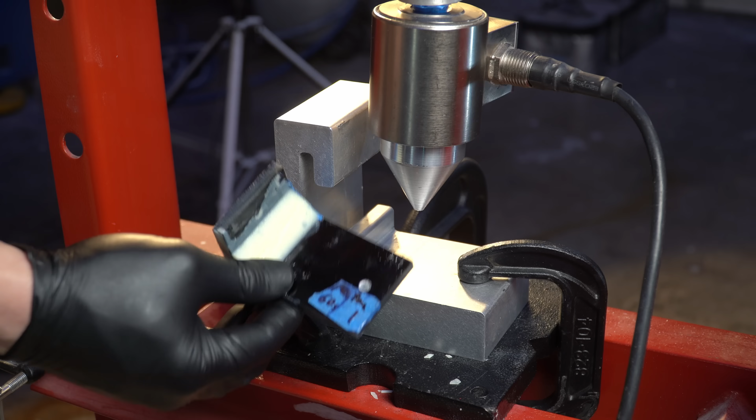I'm about to break these two parts, and they're identical except for one key difference. They're from the same sheet of fiberglass, prepped with the same sandpaper, and bonded with the same epoxy in a mold, so they should break around the same strength.

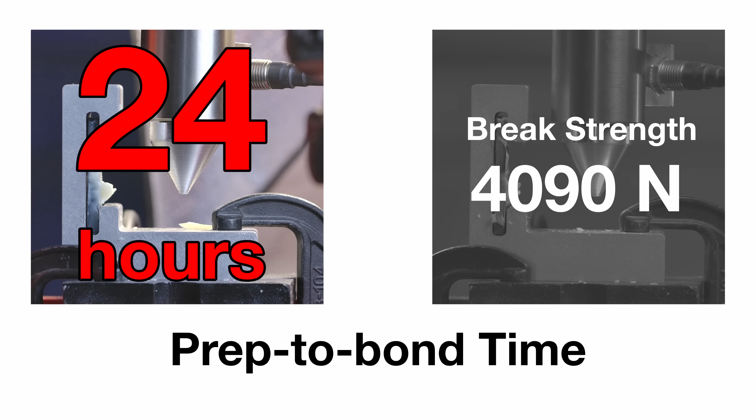What I didn't tell you is this first one was bonded 24 hours after sanding, while the second was bonded right away. If you want strong composite bonds, you have to prepare the surface as well.

So how do you do that? Ask 10 composites technicians and you'll get 10 different answers. Some use high grit sandpaper, some use low, some claim isopropyl alcohol is all you need, and others use atomic oxygen generated by plasma discharge.

I don't know what's best. I'm a guy on YouTube, so we're gonna test all those things in this video.

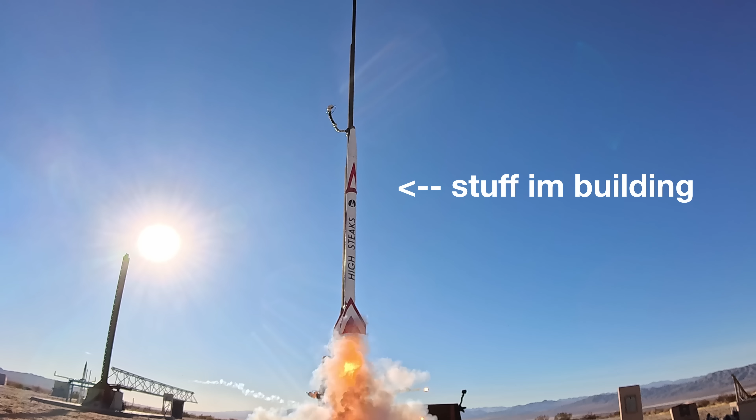I want strong bonds in my composite parts. The stuff I'm building has to survive past Mach 3. I'm talking attaching fins, gluing tubes, wet layups, dry layups, etc. If these bonds break, my rocket falls apart, so if there's a way to make them stronger, I wanna know.

I've heard lots of advice from well-meaning engineers who all claim they have the best bond preparation techniques, but they all say something different, and I don't know who's right. And I know good preparation is important, but how important? Is good bond prep really 4 times stronger?

The best way to learn is to simply test it yourself, so let's run the experiment. For this video, I ran almost 100 tests, pushing composite coupons until they broke using this hydraulic press. I measured that result using a load cell to make sure I knew as much as possible about bonding composites

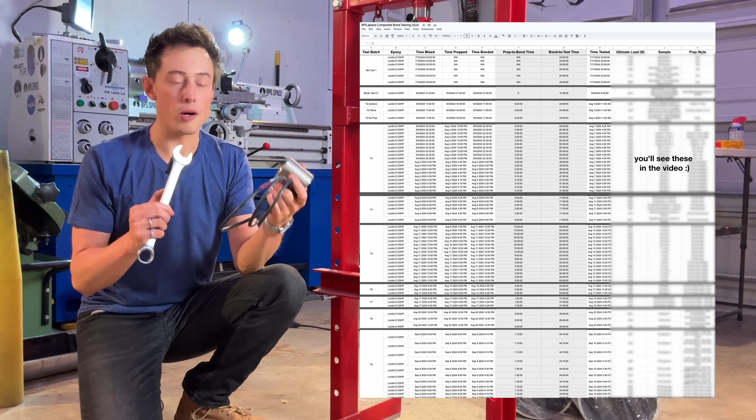together using epoxy. This stuff comes in 2 parts, a resin and a hardener, and when you mix the two together, the epoxy begins to cure.

And already before we've begun, we have a variable we need to control for: mixing. How well do you need to mix these two things together for the epoxy to cure fully?

The epoxy I'm using here, Loctite E120HP, comes with mix nozzles that mix it for me. But are these really enough? The nozzle swishes these two liquids back and forth using baffles inside. Mixing it this way reduces bubbles, and it means you should be able to apply it directly to the parts.

I'm not convinced though. Intuitively, it seems like hand mixing would be more thorough. So let's put it to the test.

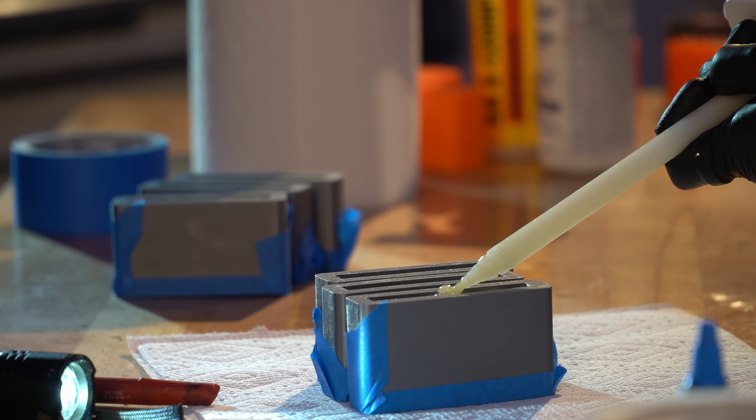Let's run the experiment. I'll make 3 test coupons in 3D printed molds, then fill them with epoxy. One batch is epoxy right out of the mix nozzle, and the other batch uses a mix nozzle with extra hand mixing and a little black dye to differentiate them.

Although, won't the black dye skew our results? Hold on to that thought for a minute.

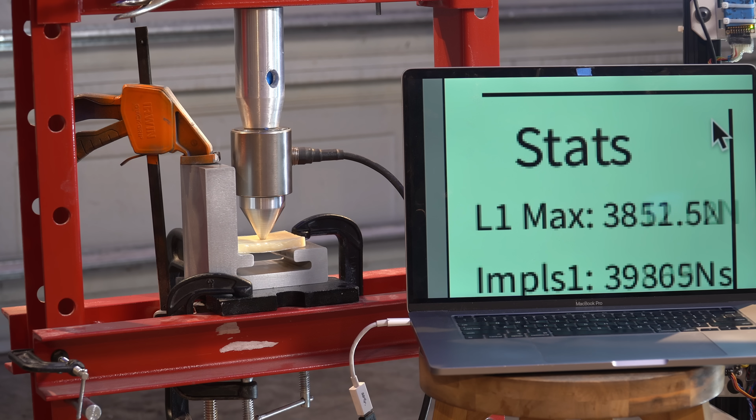The average of the 3 mix nozzle samples was around 4,200 newtons, and the average of the hand mixing samples was around 4,500, about 7% better.

So is it the black dye that increased the strength, or the mixing that increased the strength? Maybe the mixing went up 10% and the black dye reduced it by 3.

This is the part of the video where I tell you that I am not an expert and these are not proper tests. Every number you hear in this video is real, but it's anecdotal evidence at best. It's not proof of anything definitive, and here's why.

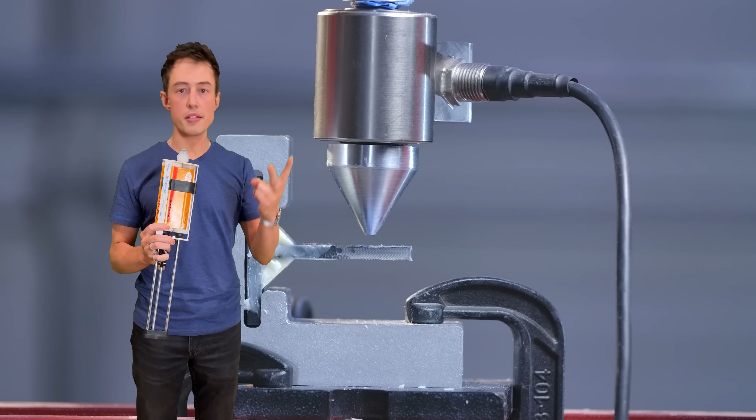There are many uncontrolled variables in these tests, things like the black dye, side-to-side shifting of the load cell, inconsistent mix technique, etc. But most of all, for each data point in a test, we're usually averaging between 2 or 3 sample articles, while most standards and testing organizations would advocate for at least 5 or 10.

I'm not making any of these numbers up, they're all real, but there's a big difference between lab-tested, peer-reviewed data and a guy making YouTube videos in his garage.

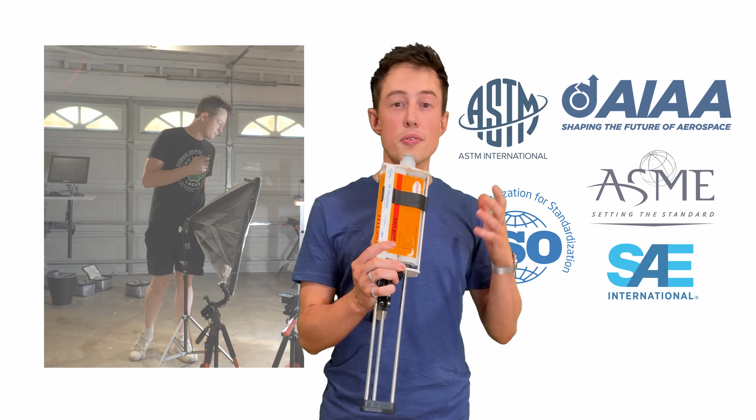What I'm here to do is gather a little more data to inform how I build my rockets, and when there are inconsistencies in my testing methodology, I'll try my best to call those out.

So as we jump into this, be aware this data is incomplete and should be taken with a grain of salt. But there's still value in incomplete data, and salty food can be good from time to time.

Our first test series will evaluate a wide range of bond preparation techniques, and we'll do 2 coupons with each of the following: no prep, 10 seconds of acetone wipe, 1 minute of acetone wipe, 10 seconds of IPA wipe, 1 minute of IPA wipe, then sandpaper in 60 grit, 120, 320, 600, and 1000 grit.

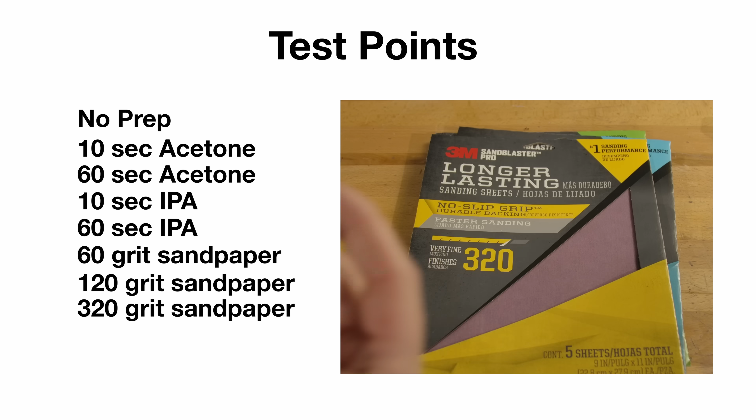After sanding, the surface is wiped clean using lint-free wipes soaked in 99.9% pure isopropyl alcohol.

Each of these samples are cut from 1/4-inch fiberglass sheet. I selected this instead of carbon fiber because I had a bunch of it lying around, and it's a little cheaper this way. Some of this stuff has black dye in it, and some of it is green. This is an uncontrolled variable, and if we were in a lab doing proper tests, this wouldn't fly. But imperfect data can still have value, and since I'm filming this at the end of all the testing, I can tell you with decent certainty the green versus black fiberglass didn't make much of a difference.

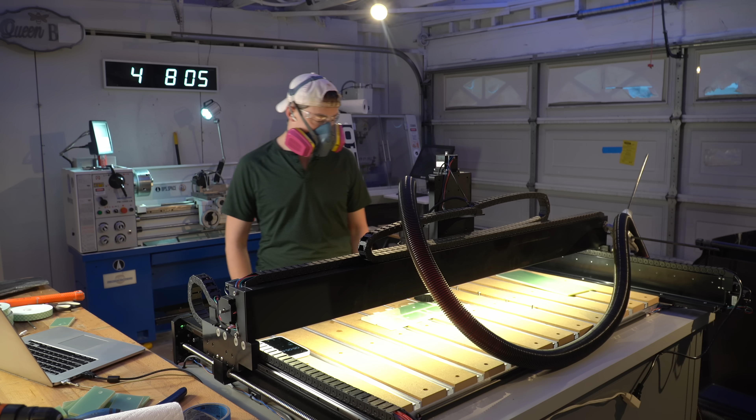I cut out 2x3-inch coupons on the Carbide 3D Shapeoko, and after bond prepping them, I placed them in 3D printed molds to allow the epoxy to form into the shape that I wanted. The molds are coated in superlube with a long stick beforehand to act as a mold release so that the epoxy won't bond with the print.

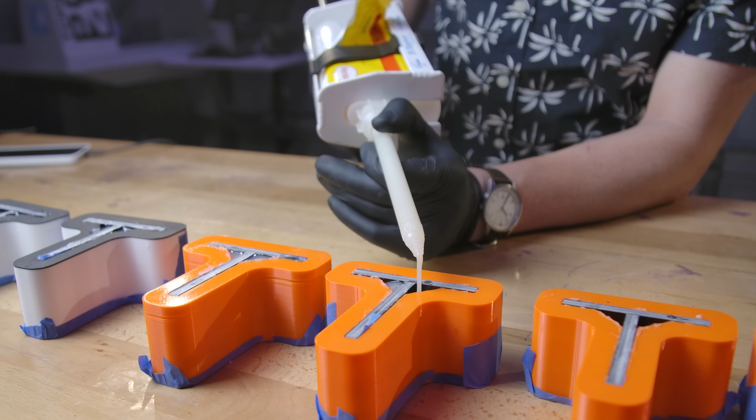After labeling each coupon and putting the epoxy into the mold, I put each test article into the vacuum chamber to remove all the bubbles I could. It usually took a few iterations of this to get the epoxy to not bubble over the top of the mold and spill everywhere. Once cured, the superlube as a mold release kind of worked.

It required some extra force to extract it every time, but nothing close to the breaking strength of the epoxy, so I wasn't too concerned. The cracks you hear in these clips are tiny pieces of epoxy fracturing, but most of the bond should be fine.

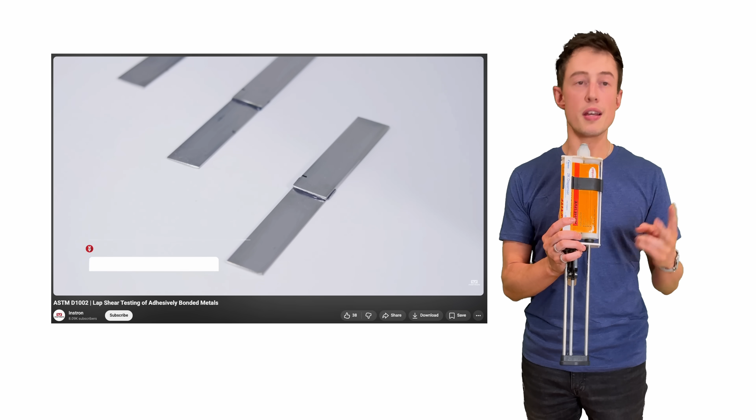You might be wondering by now why we're setting up the test coupons this way. Most composite bond testing is run as single or double lap shear tests. That's where you take the two pieces and press the flat plates together, then pull them apart lengthwise and measure the stress and strain. Oftentimes this is done with a fancy machine called an Instron, and you're getting way higher fidelity data than anything we're doing here.

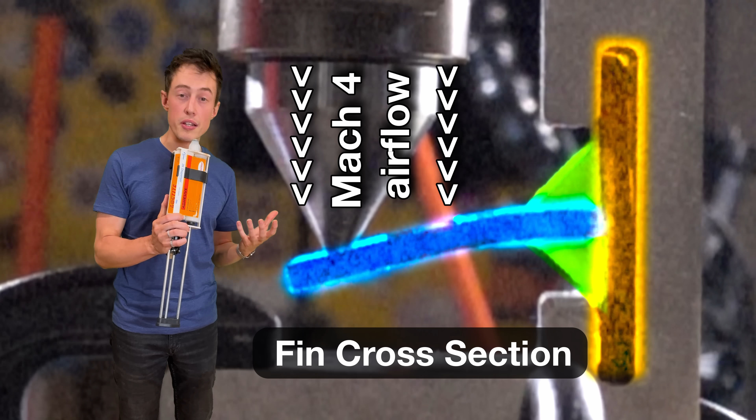But this cantilevered setup isn't very common, and my goal here is to emulate the actual scenario that I'm concerned about, which is a fin snapping off in flight. You can think of this as the body of a rocket and this as the fin of a rocket with some pretty chunky fillets. If this rocket gets a little silly at Mach 4 and it turns to the side, this surface will see a crazy amount of load, and that is what we're simulating.

Looking at a cross-section, there's a little bit of everything in this test setup. There's some compression here, some shear here, some tension here. There's a little bit of tension and shear in this area.

In hindsight, I wish I had run lap shear tests, because the failure mode for most of these tests was about the same. Each test broke at a different strength, but they all failed by either shearing off at this surface or breaking in some combo of tension and shear around that area. But hindsight is 20/20, and say it with me, imperfect data can still have value. Let's begin.

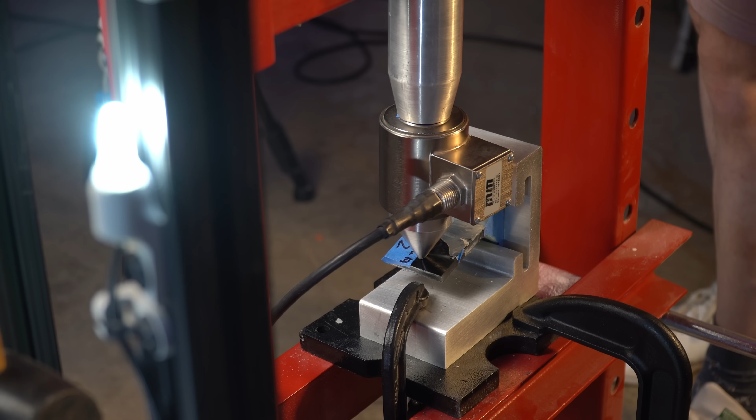With no bond prep, we get about 3,000 newtons and 1,800. With a 10-second acetone wipe, they both hit just above 3,100, and 60 seconds was a little worse, averaging 2,700. So maybe too much acetone can actually hurt performance. Keep that one on your noggin.

IPA performed consistently well in both the 10-second tests and 60-second tests, averaging around 3,300 for both. Sanding is where it gets interesting.

My first 60 grit sanding test performed excellent, averaging around 4,000 newtons. 120 grit had a little more deviation and averaged lower at around 3,600. Then it falls off a cliff. 320 grit had enormous deviation between 3,200 and 1,800 newtons. 600 grit averaged 2,900, and the single 1,000 grit test I ran was a pitiful 1,400 newtons.

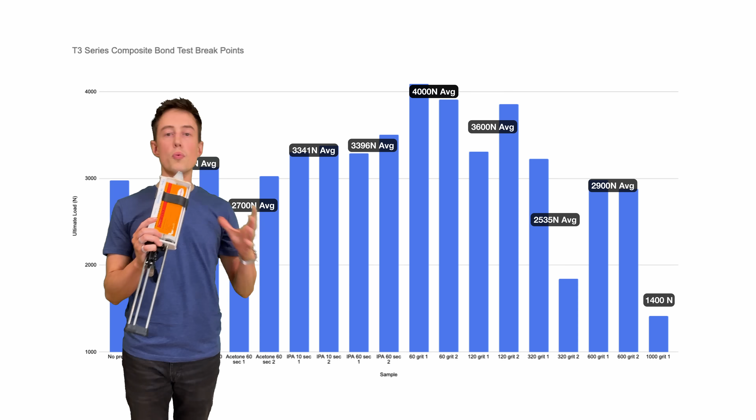So what can we learn from this? First, I like how consistent the IPA was. Consistency is important, and we will come back to that later. Second, I'm impressed by the 60 grit strength, and there does seem to be an inverse correlation between the grit size and the total strength of the bond.

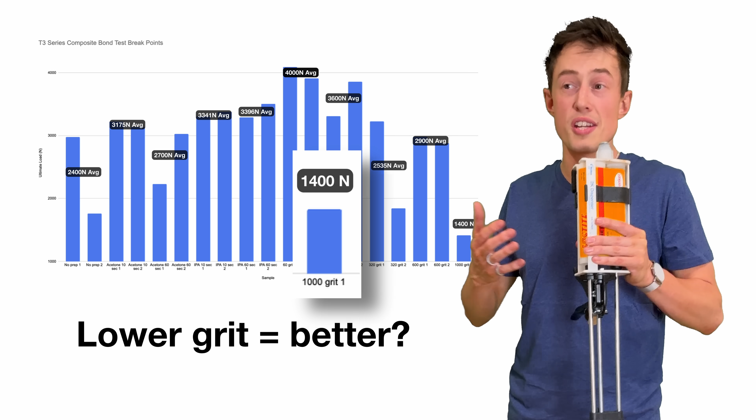It's pretty easy to look at this data and come to the conclusion that lower grits must perform better than higher grits, and once you get up to 1,000 grits, we're essentially polishing the part, so it's no surprise that it broke at a measly 1,400 newtons. So far, 60 grit seems to be our strongest performer, so let's dive deeper and find out why.

I'm keeping each of these samples in bags with their associated shrapnel. I mean, the epoxy shards that come off. For one of the no-prep coupons, it's no surprise these didn't perform well.

The glossy surface tells us this is an adhesive failure, i.e. the epoxy delaminated from the surface of the resin in the fiberglass. I do see areas where this isn't the case, which means we probably got lucky on the samples that performed well. I should also mention these parts are still covered in superlube.

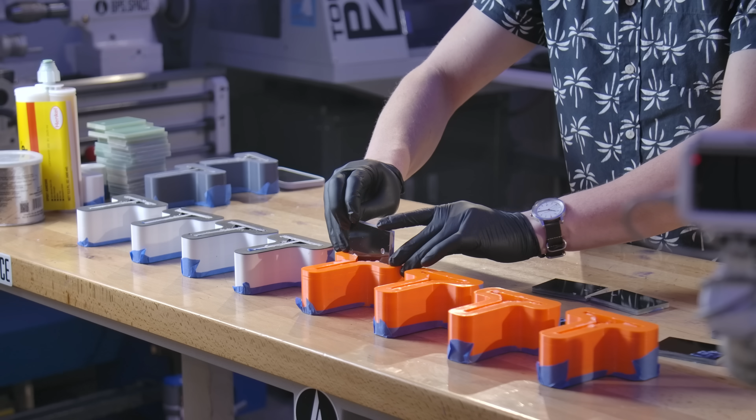When I place them in the mold, I'm extremely careful to not let any of the superlube touch the surface. It's possible in all these tests that there's a little superlube contaminating the epoxy, but I largely doubt that this is the case. Looking at the 60-second IPA sample, we see two different failure modes.

This is a cohesive failure, which means the epoxy itself broke and left a little bit on the surface. On the other piece from this sample, we have a substrate failure. That means the structural epoxy ripped off the top layer of the substrate, or the resin on the fiberglass.

For the 60 grit sample, we can see a combination of these two. The epoxy shards are tearing away some of the surface resin from the fiberglass, and there's also still a little epoxy on the surface.

Under a microscope, with the 60-second IPA on the right and the 60-grit sandpaper on the left, it's easier to see these two failure modes. For the IPA, we have this total delamination of the resin, so we can see the weave under the substrate, and the 60-grit surface is still rough, which probably contributes to a multimodal failure mode.

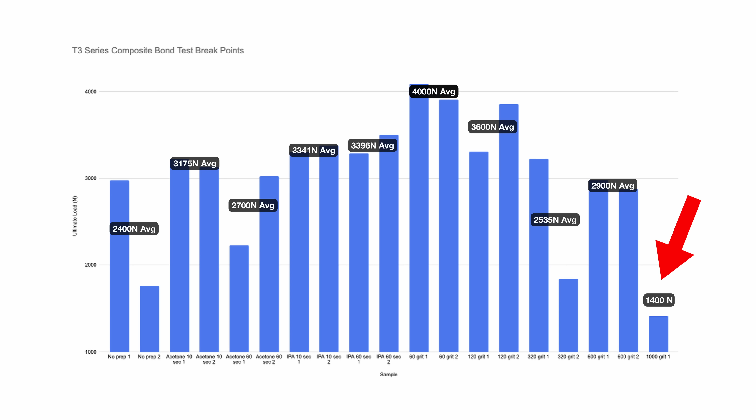For my worst performing sample, the 1000 grit, it looks like we had a real fast delamination on the bending piece of fiberglass, and this is consistent with the high-speed footage. The coupon just lets go with very little violence, unlike what we see in other break tests. The top layer of resin almost looks untouched.

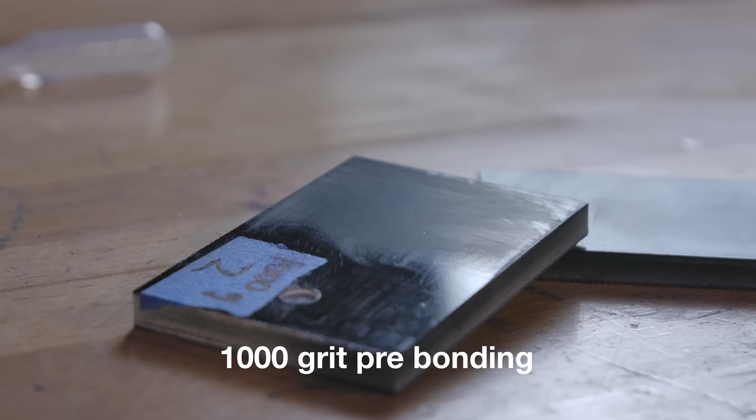It almost seems like we had some contamination on the surface, which is strange because I wiped it down with isopropyl alcohol after sanding. But let's take what we can learn from the 60 grit and see if we can get higher than that 4,000 Newton number.

On the next round, I prepped 3 sets of dual samples, all with 60 grit sandpaper. The first set were sanded with reasonable pressure until the entire surface went from glossy to matte. This basically ensures the whole surface is fresh, so to speak, and I'm calling these 60 grit till gray.

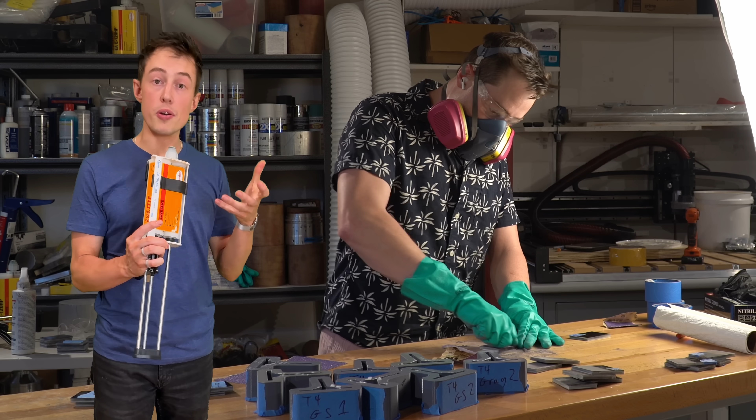The second set was sanded with 60 grit sandpaper, but much harder this time. I pushed deep into the composite material, hoping to scuff up and expose some of those composite fibers. My thought was that maybe exposing some of those fibers would give us more area to bond with.

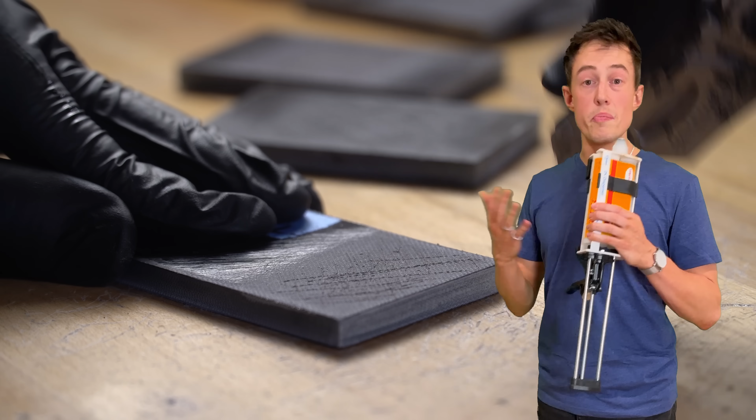The third set was sanded like the first. I sanded using moderate pressure until the piece was gray, but then I scored it with a knife. Maybe by allowing the epoxy to seep deeper into these grooves, we'll get a higher bond strength. Low grit sandpaper seems to perform well, so what if we just rough up the surface even further?

For each of these samples, after cleaning with IPA, I pushed epoxy directly through the mix nozzle into the mold. Then I let them cure for 48 hours, and now let's break them.

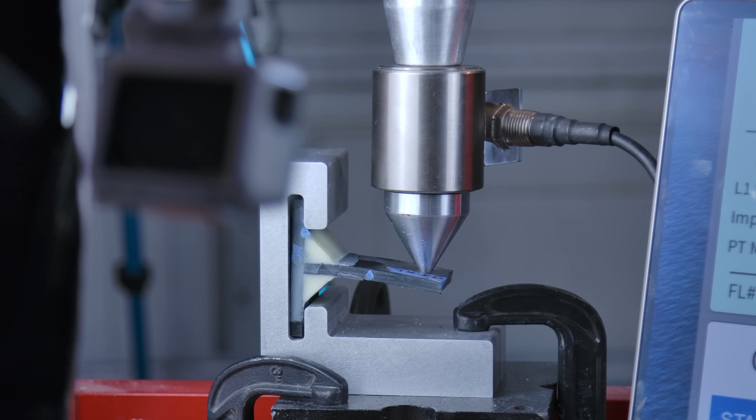The 60 grit till gray averaged 2,750 newtons. The 60 grit hard sanding averaged about 2,100, and the 60 grit till gray with scoring averaged about 2,750, just like the first, though with a much wider deviation between the two samples, so we've got less consistency when scoring is involved. All 6 of these tests were far worse than the 4,000 Newton average from the first 2 60 grit tests. Something is consistently off here, and I think I know what it is.

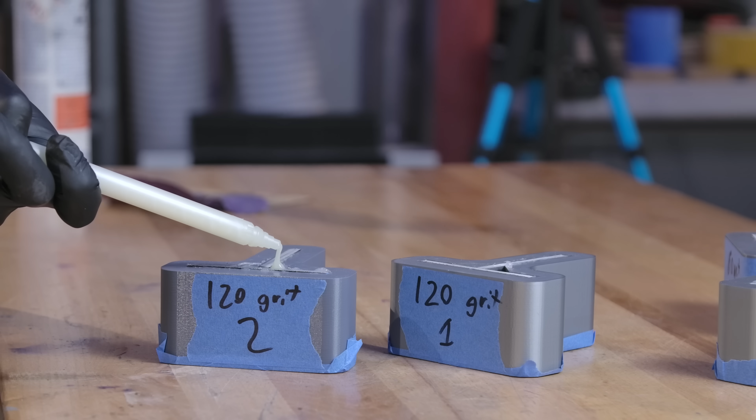Vacuum degassing: during the first round of tests, I degassed in the mold, but I found that it made loading the epoxy much less consistent, so I neglected it on this more recent round. The vacuum chamber made the epoxy expand so much that it bubbled out and over the mold, which meant I had to refill the epoxy, then re-degas in a couple of steps until that stopped happening. So I tried this round of tests without it, which is another inconsistency, but that can be okay so long as we're aware of it.

Skipping the vacuum step means the epoxy might have lots of tiny bubbles within it, and it's probably not mixing as well. So what can we learn from this round? First, vacuum degassing is important. I think that even if the mix nozzle is doing a good job and there aren't many air pockets, we're still getting further mixing when those bubbles come out through the vacuum degas process. If I had to guess, using my data alone, it looks like vacuum degassing can add as much as 25% strength into the epoxy.

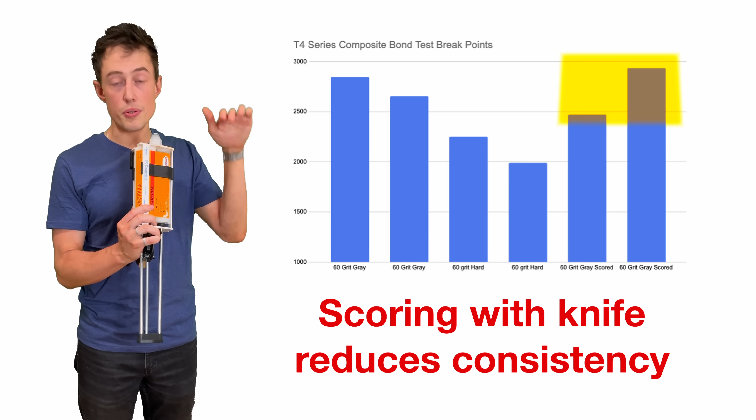Hard sanding seems like it can reduce the strength of the bond. Sanding with a medium force until the surface is gray seems best, and although scoring can help, it can also hurt. There's a very wide split with the scoring results. And here we go again, talking about consistency. It's very important, and hand sanding makes consistency hard to get. So what if there's a method of bond preparation that doesn't require sanding?

Whoa, did that guy just fall down a well? Hey man, are you all right down there? Yeah. Can you get yourself back out? Sure, but it will take about 60 to 90 seconds. Okay, and is there anything I can do to help? The sponsor. What? Tell them about the sponsor. You don't want me to call like the fire department, like emergency, sir? You know what? Sure, man.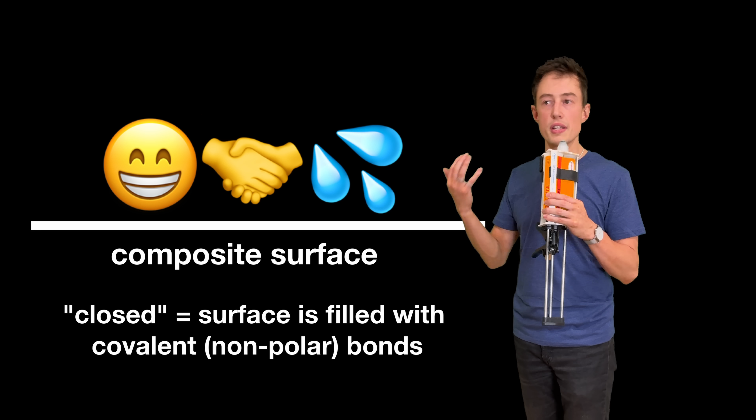High surface energy objects aren't as common, so usually we have to do something to activate that surface. To raise that surface energy, we're gonna take all those happy bonds on the surface of a material and ruin their day. These bonds might be formed with oil and dirt and grease, and if they're completely closed, they're just not gonna be open to receiving anything new. We need to break as many of these bonds as possible so they can bond instead with the epoxy.

Using solvents to clean off contaminants on the surface can break some of these bonds and raise the energy a little bit. Sandpaper breaks these bonds almost by definition. When we're etching until the surface is completely gray, we can be sure that we've etched away to fresh material. But there's another way to do it.

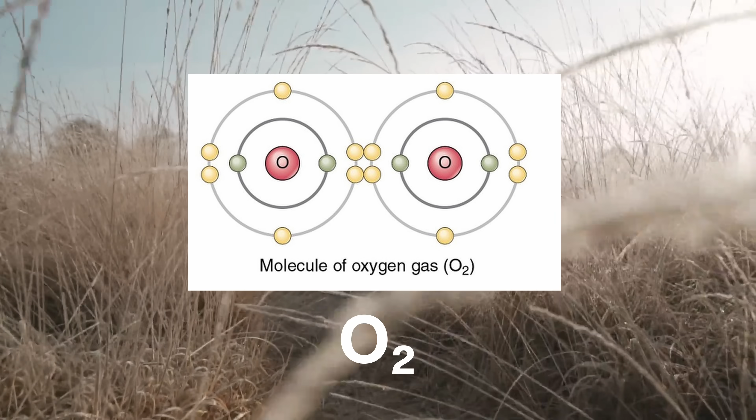You can also use plasma, and specifically the atomic oxygen that is generated within the plasma discharge. I promise not to get too deep into the weeds here, but atomic oxygen is crazy. Normal oxygen, like we're breathing right now, is O2, two atoms of oxygen bonded, but atomic oxygen is just one of them, and boy oh boy is he hungry. He's unstable and has high energy, and he wants to bond with literally anything that can get him to a lower energy state. When one of these guys runs into anything it can oxidize, it does, and it releases a lot of that energy in the process, which can break molecular chains around whatever it hits.

This isn't just a bond prep thing. Atomic oxygen is a big challenge for spacecraft in low Earth orbit. There's a lot of atomic oxygen in the upper atmosphere, specifically in the thermosphere. Spacecraft in orbits around there are getting slowly eaten by atomic oxygen constantly.

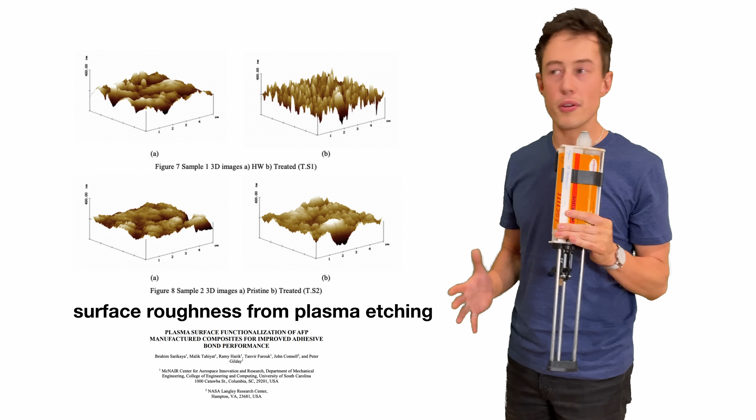So back to bond prep. We can use this atomic oxygen to etch away the material at a molecular scale, but we're also cleaning it. The hungry oxygen atoms want to bond with everything, which means they'll bond with oil, dirt, any contamination, and they'll carry it away. Atomic oxygen is incredible because it's like we're sanding and cleaning with IPA at the same time.

So, probably don't try this at home. High voltage is very dangerous, but if we take a high voltage source and create an arc across two leads, that arc is going to be made of plasma. And the concentrated energy within that plasma is enough to break apart and dissociate the oxygen in the air around it. So we've got some atomic oxygen in there.

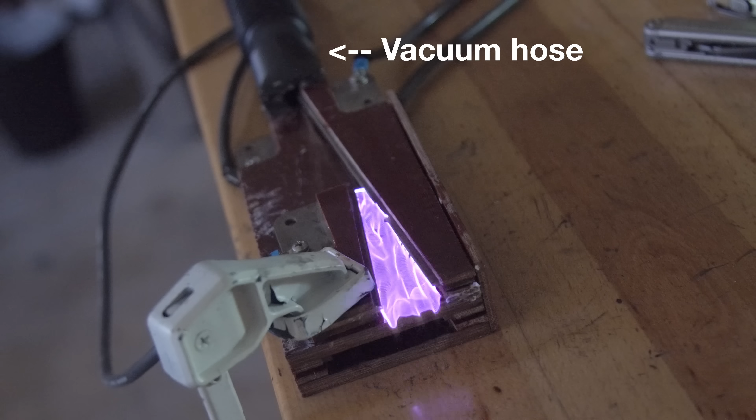Then, if we take a vacuum hose and hook it up to the outlet of a vacuum and blow air across that arc to force it down these long steel leads, we aren't just lengthening the plasma, we're making it last longer, and we're also blowing that atomic oxygen out the end of this gliding arc. This is called gliding arc discharge, and it kind of worked.

You can test surface energy using a water break or contact angle test, and we've done this in past videos before. By putting water droplets on the surface of a material that you've just recently prepped, if the water spreads out and has a very low contact angle, that means the surface is pretty active. It has a high surface energy and it's ready to bond with.

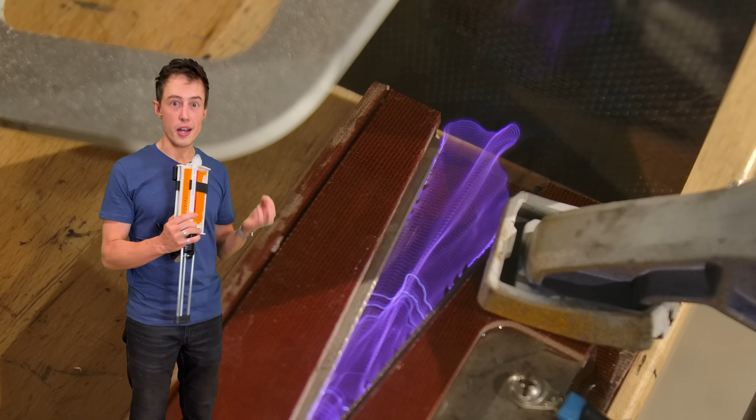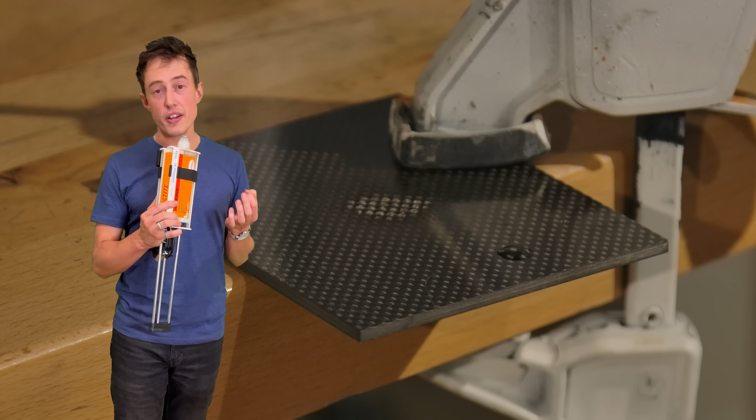I used contact angle tests to measure the results of the gliding arc discharge setup, and I could never get consistent results. Sometimes I managed to get good results, but that was only after 10 or 15 minutes of consistent application to the same spot. That's not a very high potency for bond preparation, and in terms of the time involved and the size of the parts that I'm working with, sanding and IPA is going to be way faster. I'm also not stoked about the idea of adding kilovolts of electrical potential to my bond prep process, so I think we need a new approach.

Generating plasma using electricity is one way to go about it, but you know what else is plasma?

There's a bit of atomic oxygen within this, as well as other reactive species that can help break apart the hydrocarbon chains within the resin of the composite you're trying to bond to. That's going to raise the surface energy, just like gliding arc discharge.

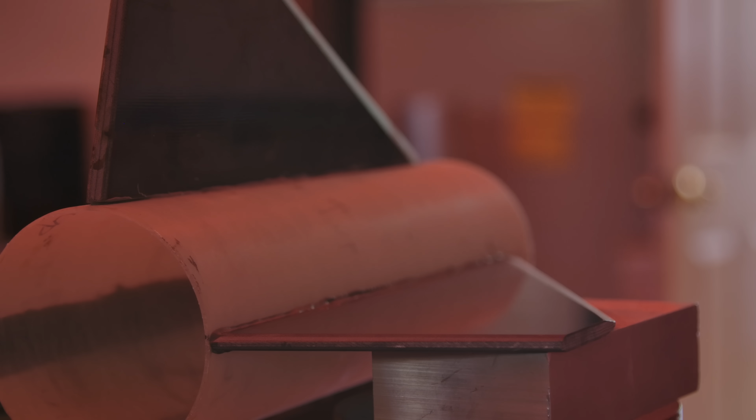We can see the effect of this not just through contact angle of water droplets, but with these dyne test pens that are designed to wet out at different surface energies, letting you know just how effective bond prep was. After slowly treating the bottom half of this fin with a few passes of a butane torch, the pens clearly indicate the transition from low surface energy to high surface energy.

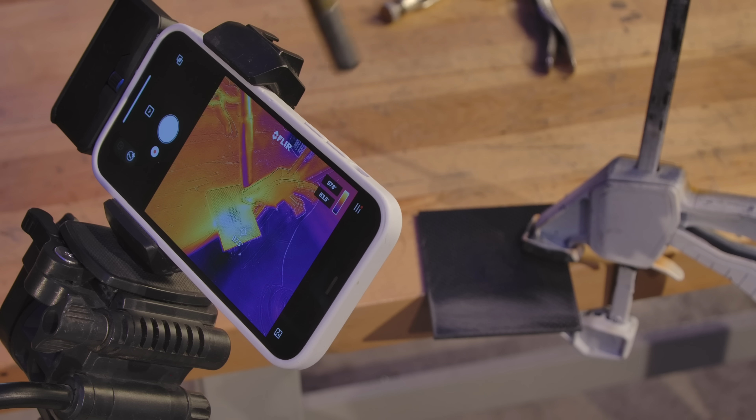The obvious downside here is heat. While gliding arc discharge is a non-thermal plasma, so it can't burn the part, this is pretty thermal. Most epoxy resins aren't rated to anywhere near this temperature, so for this to work, you need short, fast passes at a controlled distance from the part.

And if you get that wrong, even a little bit, you will burn off the top layer of resin, compromising the strength of the substrate, and probably scrapping the part entirely. This smoke means you're not going to space, and I viewed the flame treatment as a little too risky for me. If the options are kilovolts of electricity, an open flame, or sanding, I'm gonna pick sanding every time.

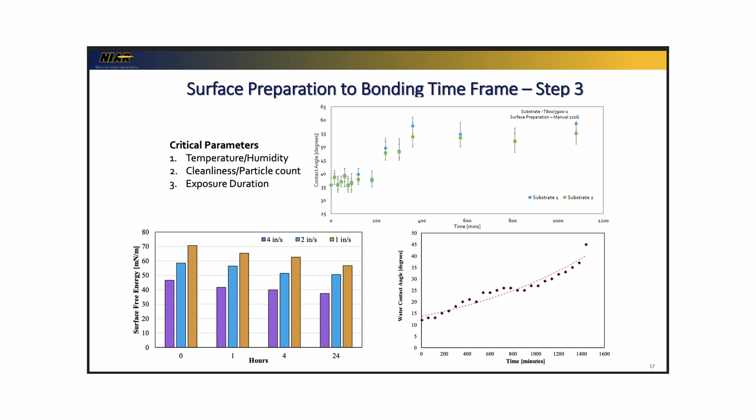Something I've always heard is that you need to prep the surface you're bonding to as close to the bond time as possible. I've been told that if you wait more than a few hours between prepping and bonding, you're giving up a lot of potential strength, and I believe this. You can find lots of published data that supports this idea, but lab data isn't always representative of your particular situation, and I'd love to find those numbers myself, so let's do it.

Let's run the experiment. We're going to prep 16 samples tested in pairs at discrete times: 74 hours, 49, 24, 11, 7, 3, 1.5, and immediate bonding.

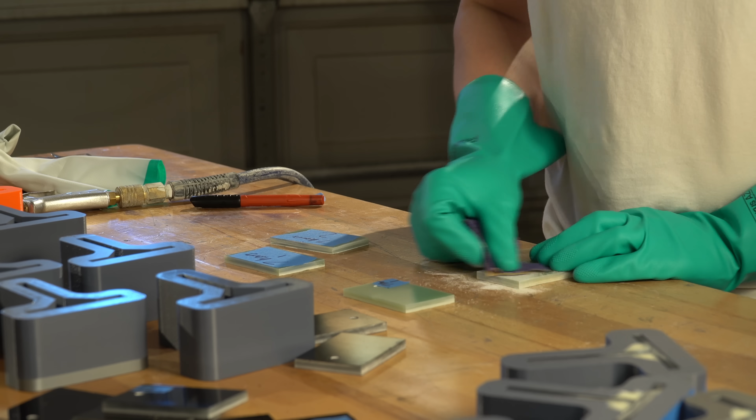Leading up to the bond, I prepped each sample at the right time so that I could glue them together all at once. After sanding each sample, I wiped it clean with isopropyl alcohol, then let it sit in the corner of my garage until it was time to bond. I didn't do anything else in the garage during testing, so the environment should be free of mold release, cutting fluid, machine oil, or other contaminants.

I mixed the epoxy extra good in a cup beforehand with a drop of black dye, then vacuum degassed it in the cup. Then I poured that epoxy into each mold and vacuum degassed again to try and get the most consistent performance from each sample.

These samples should be absolutely identical apart from two variables. The first is the time between the prep and the bond - that's the variable we're controlling for. And two is the sanding itself. You can't hand sand something the same exact way every time.

In an effort to fight this and get more consistency, about halfway through the testing I switched to an orbital sander, which provides, hopefully, more consistent results. I regret doing this in hindsight as it tarnishes the data I was hoping to capture, but if we see a significant change between the orbital sander and hand sanding, we'll kind of know what's up there. And that's enough yapping from me, let's break them.

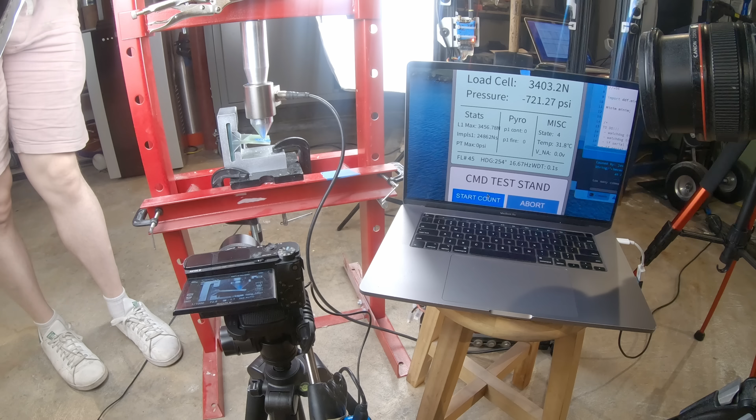At 74 hours, we've got 2600 and 3500, averaging 3100 newtons. At 49 hours, we have a wider split with an average of 2700, and at 24 hours, we have an extremely wide split averaging 1900. That lower bound is our worst result yet at 1100 newtons, which is worse than the 1000 grit sandpaper.

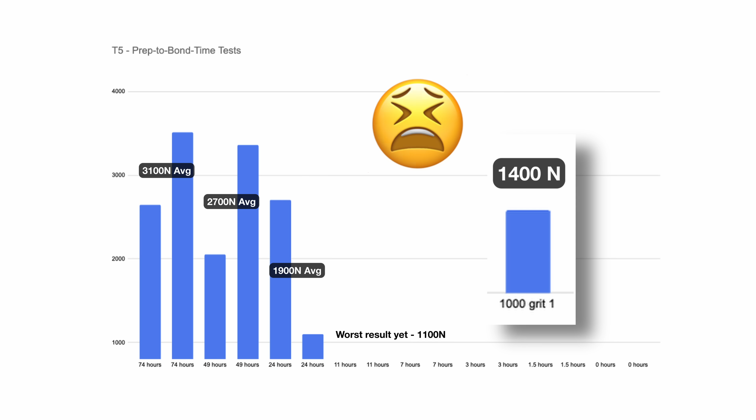Ouch! If what I've heard is true, as the prep to bond time goes down, the strength should go up. So it makes sense to me that these early results aren't great, but let's keep going.

At 11 hours, we have two solid results averaging about 3,500 newtons, and at 7 hours, another two strong ones averaging 3,300. At 3 hours is where I switched to the orbital sander, and we have a big split between 1,700 and 2,900, averaging 2,300.

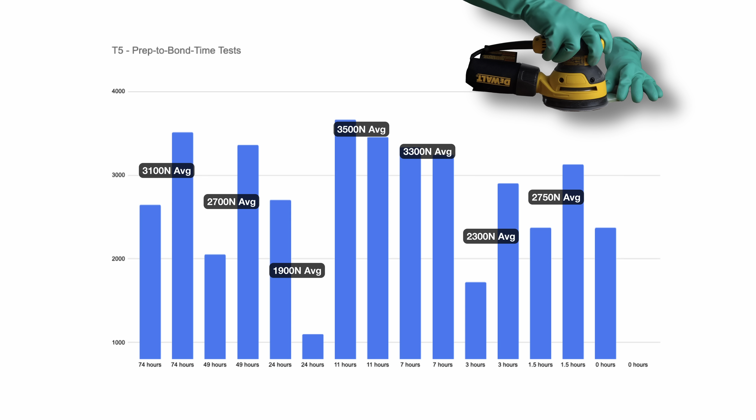At 1.5 hours, we have a smaller split averaging 2,750, and the immediate bond test dropped to an average of 2,300. These results are very messy, but I think we can still learn from them.

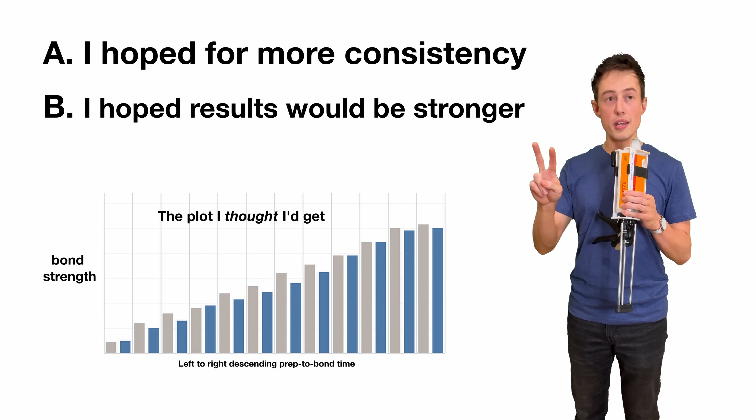First, I don't think there's enough data here to draw any strong conclusions - straight up, there's just not enough statistical significance when each test only has 2 samples. If we're looking for trends, we should be careful not to look too closely. When I set up this test, I was, A, hoping for more consistency in the results as a whole, and B, hoping that we'd see a way clearer correlation between the time between prep and bond and the strength of the bond.

That's why I felt okay running 2 samples per test, but I do think there's still a little bit we can learn from this. While I don't see trends, I still see possibilities. It's obviously possible to get a strong bond with 74 hours between prep time and bond time, and in the same vein, it's obviously possible to get a weak bond if you bond immediately. There are lots of factors at play. This should be obvious by now.

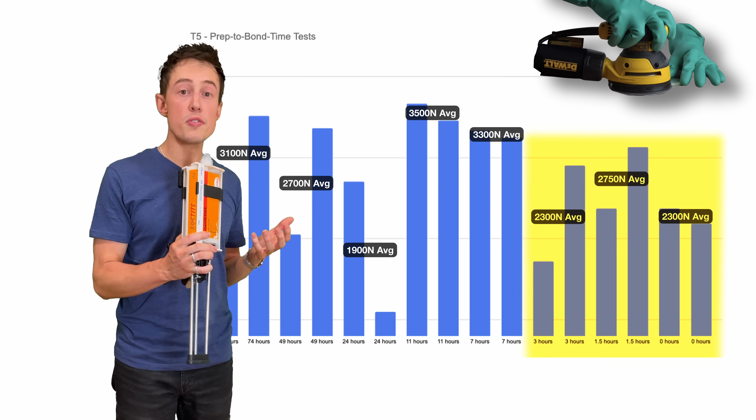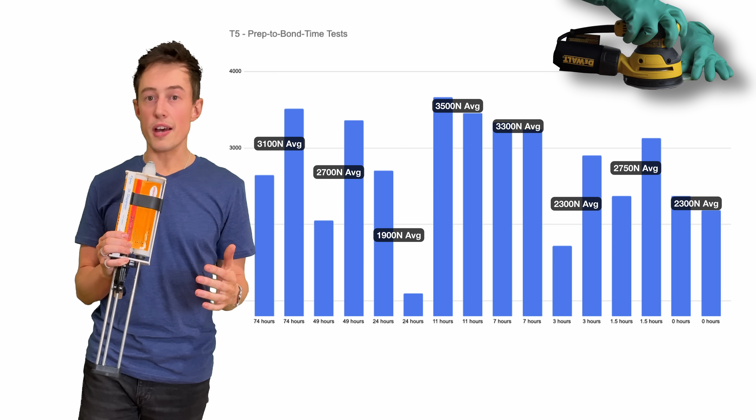If I squint and look for trends, it does seem like the orbital sander is less consistent, especially because we'd expect the more recent results to be stronger than these. It's kind of hard to ignore that a lot of the data after 12 hours is all over the place. This data is incomplete and imperfect. It still has value, but we should be really careful not to draw strong conclusions from it. What we should do instead is collect more.

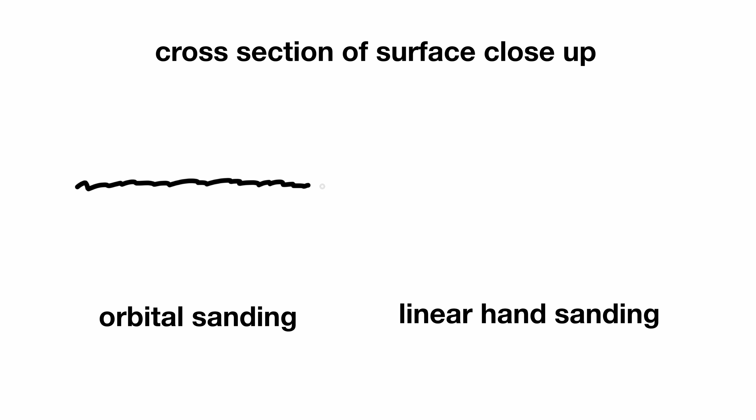I started to think a little harder about how the orbital sander works, and it's in the name: it sands in an orbit with tiny little swirls. The sander vibrates while rotating the sandpaper, creating lots of little swirls on the surface. For hand sanding, I had largely moved my hand back and forth in straight lines. The difference is that with a large enough area and distributed load, the orbital sander probably leaves a flatter surface overall, whereas hand sanding cuts deeper grooves. It's as if the orbital sander creates tons of micro scratches in a uniform surface, whereas linear sanding cuts deeper and likely results in more surface area for the epoxy to bond with.

I might be falling for the coastline paradox here, and that's always how I've heard it described from experts in composites manufacturing. The surface may look smoother, but it actually has more ridges and, as a result, more surface area than a rough surface. It's just rough at a microscopic level, which means it could be more surface area than a low-grit sandpaper. But once again, if we want to know the answers, let's just run the experiment.

I made 3 more coupons that I linearly sanded hard with 60-grit sandpaper. If the orbital sander seems to make it worse, maybe linear sanding is the key to getting back to that 4,000 Newton number, so we'll do that by pressing hard with 60-grit sandpaper. Every time I do these tests, I'm using brand new sandpaper to reduce contamination. That's important, so I'll say it again: every time I run a new series of tests, not necessarily when I make a new coupon, I get a new piece of sandpaper to reduce contamination.

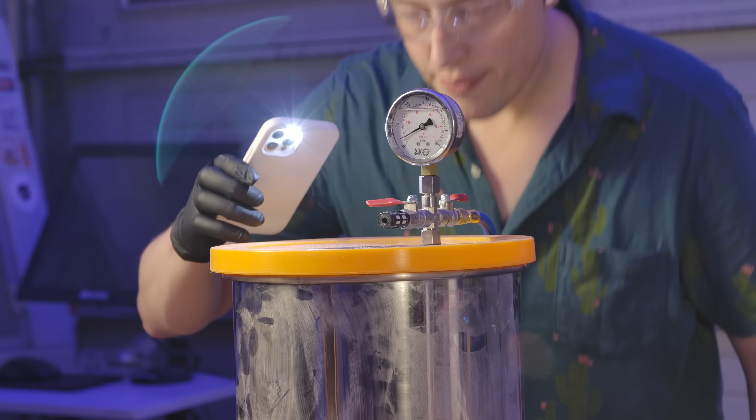This is foreshadowing, but I bet it's not in the way that you think. I kept the sanding direction mostly consistent, aiming to create deep, straight grooves, then I wiped each surface off with IPA to clean it. I then mixed up another batch of Loctite E120HP with a bit of black dye, and vacuum degassed in the mix cup before pouring it into the mold. I was burnt out by this point, so I skipped the step of re-degassing the epoxy while it was in the mold. This is another inconsistency, and if these results perform well enough, I figured I could rerun them with more degassing.

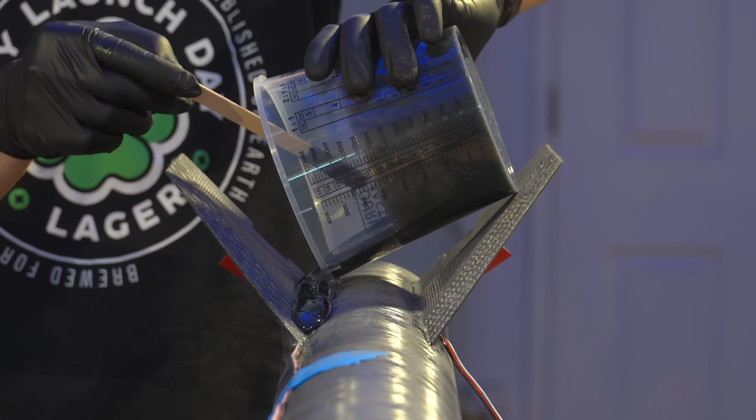This is also more accurate to the way I'll be bonding fins onto my rockets. These fillets will be big enough that it'll be hard to degas the epoxy once it's on the surface, but all of this assumes I ever find a good solution here. So let's fast forward and break these samples.

These 3 samples are all identical with consistent preparation, cleaning, epoxy, degassing, etc. And yet the only thing we are consistently doing is falling well short of that 4,000 Newton number from the early 60-grit tests. The spread between them is wide too, with 3,300, 2,900, and 1,900 Newton breakpoints, this is not good.

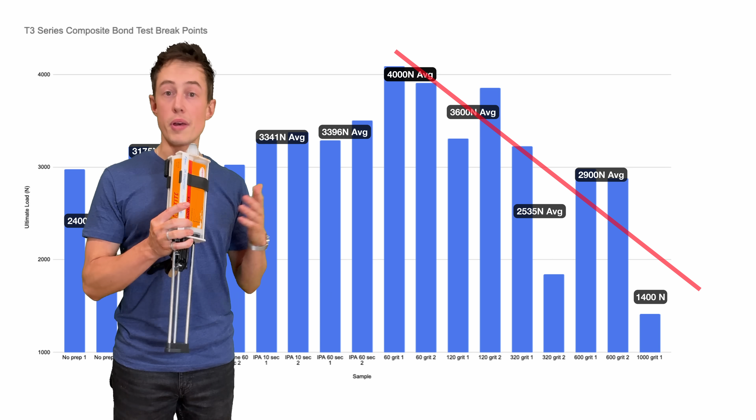Next, I followed some logic from my original testing, which seemed to indicate that lower grit sandpapers perform better. We've been messing around with 60 grit, let's go lower. How about 40? The nice thing about lower grit sandpaper is it goes a lot faster. There are really big grooves that are created here, so we etch away a lot more surface area every time we move the paper across. It might be a win-win. Maybe this is how we do big composite parts.

Just as always, after sanding, I wiped the surface clean using lint-free wipes and high-grade isopropyl alcohol. Then I mixed up another batch of epoxy with a little black dye, degassed in the mix cup, poured it into the mold, then re-degassed in the mold to get as much strength as I could. I was hopeful and trying with every technique I knew to get back to that 4,000 Newton number, and when the epoxy had cured for 48 hours... oh, wait.

Sidebar: all of these tests were run 48 hours after bonding. That's a variable I controlled for. The epoxy should cure to full strength within 24 hours, but 48 gives us a little more margin. Okay, sidebar over. After demolding the 40 grit samples, I loaded them up and let it rip.

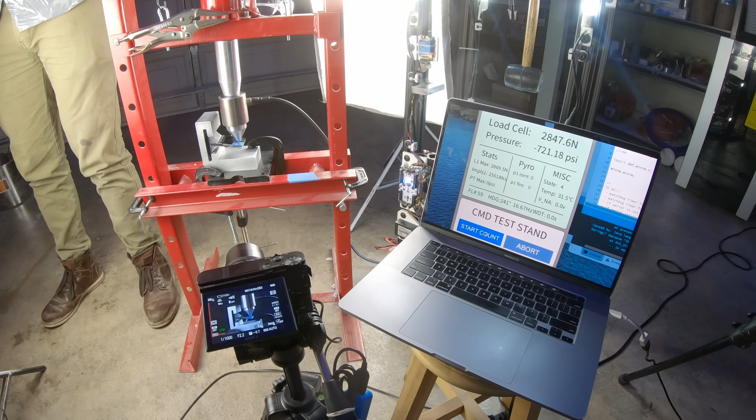So it's like a little better. We've got 3,000, 2,800, and 3,400, but 60 grit has outperformed these results plenty of times. I'm not really sure we can call this better. I think I need to give this one more really good shot. We need to pull out all the stops and give these tests every opportunity to succeed and get back to that 4,000 Newton number.

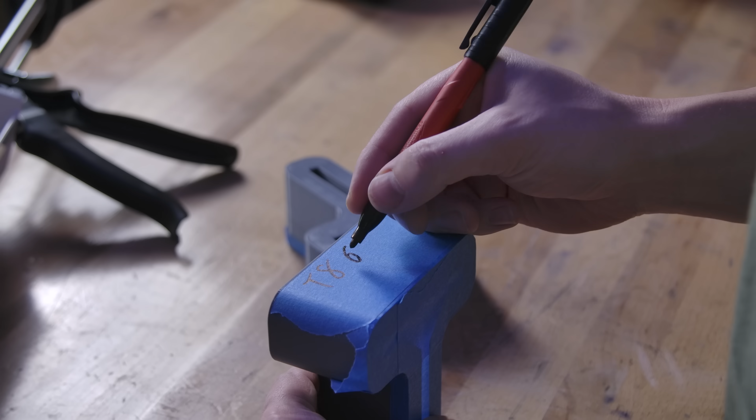I'm going to prep 3 more samples, and they're each going to use 60 grit linear sanding until the surface is completely gray. Then I'm going to thoroughly wipe it down with high-grade IPA on a lint-free wipe, switching the sides of the wipe periodically to not reintroduce old contaminants.

I'm starting to run out of fiberglass, so 2 of these are black fiberglass and 1 is green. As previously mentioned, while this is an uncontrolled variable, I haven't been able to find any correlation between the strength and the color of the fiberglass.

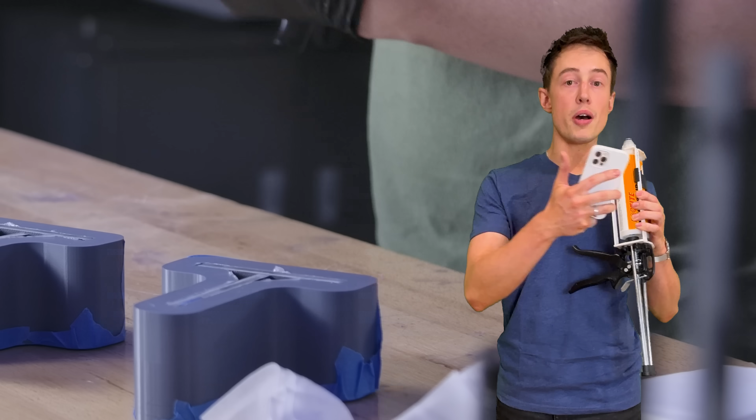To explore every option of getting a stronger bond, I also shortened the time between the epoxy mixing and the bond to the surface to a single-digit number of seconds. I dispensed the epoxy directly through the mix nozzle into the mold, then vacuum degassed it once it was in the mold. Then I left the mold for 48 hours, knowing I had given this batch every chance I could at working.

With breakpoints at 2,600, 2,250, and 3,200 newtons, we are not back. It is so f***ing over. That's an average of 2,700 with a wide deviation, and once again, it's nowhere near that 4,000 newton peak.

I'm starting to think we're trying to solve this in the wrong way, though. That maximum strength of 4,000 newtons with 60 grit sandpaper was good, but it's clearly not replicable, at least not consistently. I must have etched it in like the perfect way, or used the best possible batch of Loctite.

Oh shoot, okay, hold on one sec. All the epoxy is from the same batch. It's all Loctite E120 HP, and although I switched to a bunch of different cartridges, I purchased a large order of this stuff at the very start and ensured that the label for the batch number on each cartridge was exactly the same. So even though the cartridges are different, the Loctite batch number is exactly the same - probably as close as I can get to maintaining batch consistency.

Okay, sidebar over. We aren't getting back to 4,000, and if we do, I don't think it's valuable because we can't do it consistently. I'm trying everything I can at this point in the project, and I can barely get these samples to break 3,000 newtons, just 75% of our theoretical and demonstrated maximum. I mean, just by the numbers, the IPA alone, no sanding, is performing better. So maybe there's something I'm missing here.

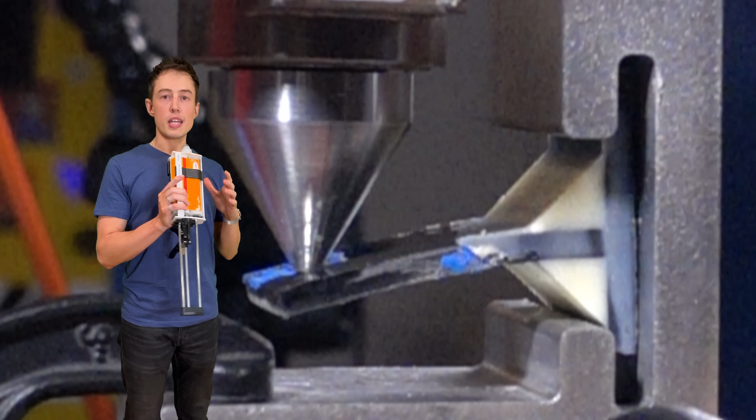When the government spends $50 billion on a spy satellite and puts it on a rocket, that rocket has to work, regardless of who works at the company, or who quit, or who recently took their place. If your goal is reliability and consistency, it does not matter what maximum strength you can achieve. It matters what strength you can achieve every time.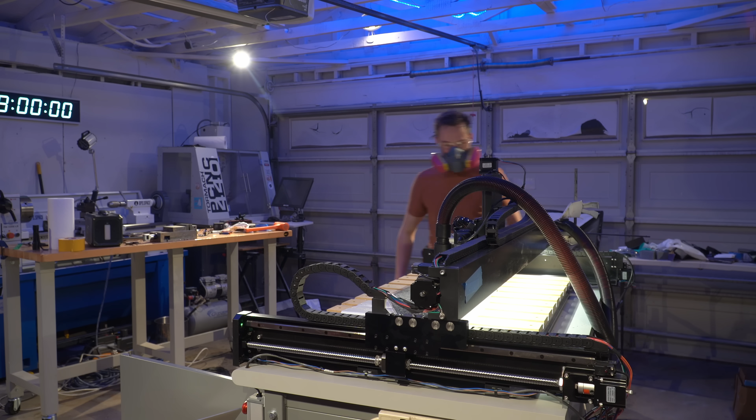Here's the plan. I cut out a new series of test coupons, and we're going to run 11 tests. First, we're going to do 4 coupons that are straight up what the expert said: no sanding, just 10 seconds of wiping with acetone, and cleaning it after with IPA. I'm using regular paper towels for acetone, and the IPA is done with a lint-free wipe to reduce debris. Technically, you should do lint-free for everything, but this is a YouTube video, not a research lab.

The theory here is that as the stronger solvent, acetone will eat away more of the surface contamination than IPA. It also slightly dissolves the top layer of resin in the composite, which is good in moderation. That helps open up some bond sites in both pieces, but it can also degrade the top layer of each composite, so the acetone should only be used in short durations, which is why I'm limiting that wipe to 10 seconds. If the acetone pools on top for longer than 3 to 5 seconds after wiping, you'll start to damage that top layer of resin, and this is likely the cause of some of the low results with long acetone wipes I did in earlier tests.

Coming in with IPA after the acetone will further help clean up residue from dissolved oils and contaminants. Sometimes these aren't fully removed by the acetone because of how fast it evaporates, and wiping them off with a lint-free wipe and IPA will further clean the area. For these first 4, I hand-mixed a batch of epoxy, degassed it in the cup, poured it into the molds.

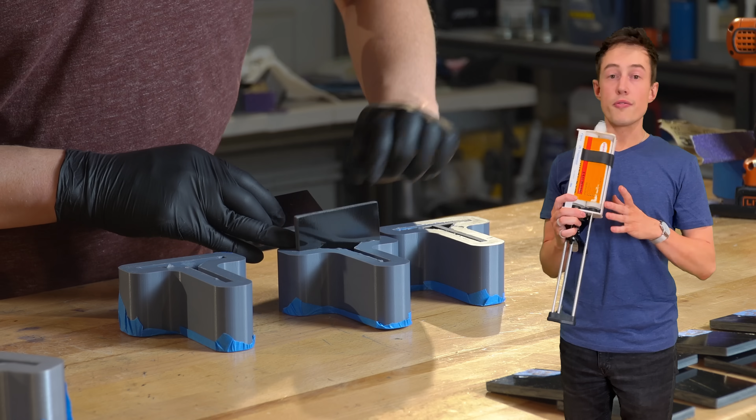And then re-degassed the molds before letting it cure. For the next 3 coupons, I'm going to run everything the same except for one step. We're not going to vacuum degas in the cup, we're dispensing the epoxy through the mix nozzle directly into the mold. My hope here is that once again we'd find some extra strength by depositing the freshly mixed epoxy right onto the surface within a single-digit number of seconds.

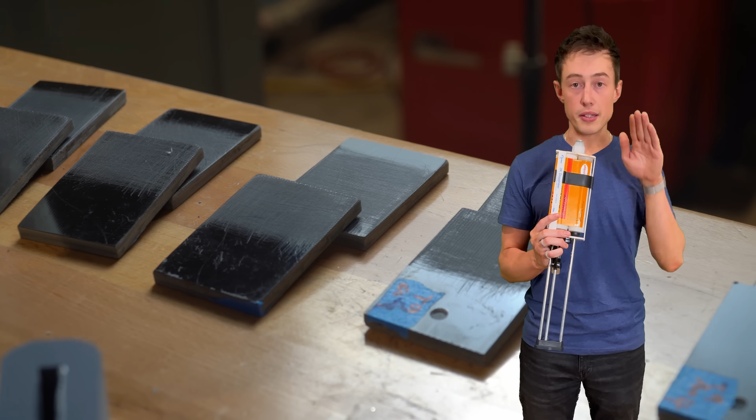Finally, we should compare this with some sanding. So I hand sanded 4 more coupons with 60 grit sandpaper. I did this with moderate strength, linearly, mostly back and forth until the surface was gray. Then, after sanding, I cleaned that surface with acetone for about 10 seconds, then came in with IPA and wiped it off just like all the other samples.

And for the epoxy, I mixed it up in a cup, degassed the cup, poured the epoxy into the mold, and then re-degassed the mold before letting it cure for 48 hours.

Folks, the results are in. We're looking for consistency. Let's see if we got it. For the straight acetone and IPA wipe, we've got 3350, 3200, 3000, and 3260. Awesome, all in the same area. For the fast bonded acetone and IPA wipe, we have 3000, 3200, and 3250. Same ballpark, no huge difference in strength. So bonding immediately versus 15 minutes after mixing had no real effect.

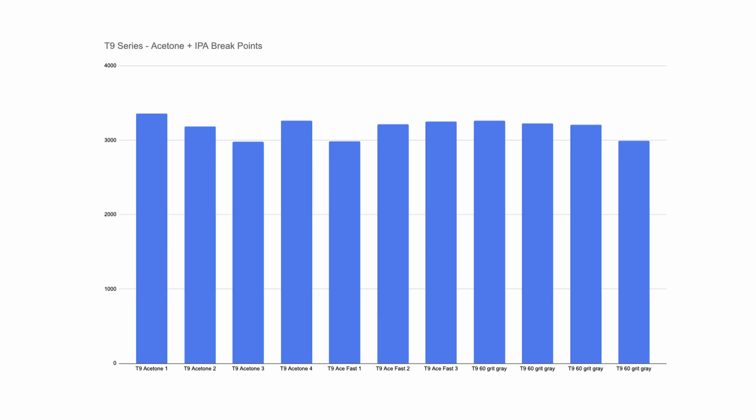And finally, for the 60 grit sanded with an acetone and IPA wipe after, we have 3260, 3230, 3200, and 3000. Interestingly, at least for my tests, sanding did not meaningfully improve the strength, and this is great news for me considering I was getting pretty tired of doing it.

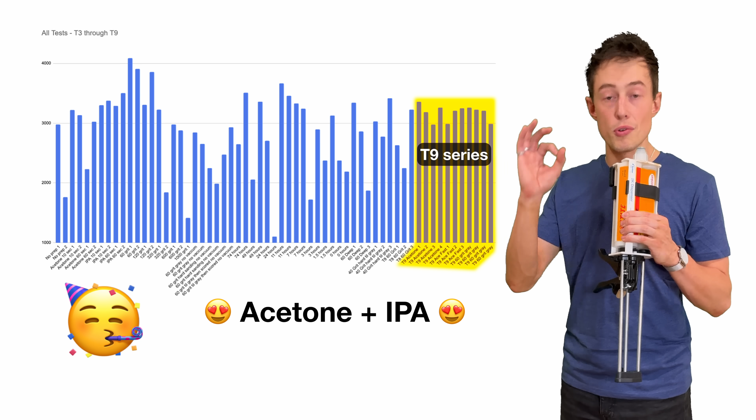The standard deviation of these coupons was lower than any other test series I ran, and that means it worked. Acetone and IPA achieved the consistency that the tech claimed it would. It seems like this is really the trick to getting repeatable bond strength, and it's remarkable how close I came to figuring this out during the earlier series of tests.

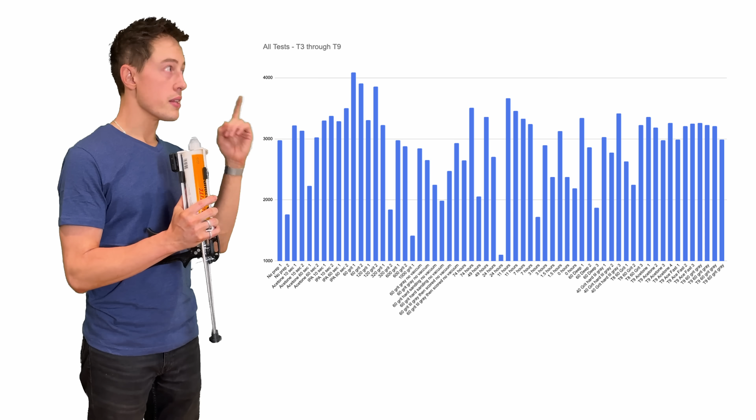This is especially true because I picked fresh sheets of sandpaper before every new test series, but not before every test coupon. So for example, on the 320 grit test, I used the same sandpaper between the first and second coupon. Whatever contamination was picked up by the sandpaper after the first coupon probably made it onto the second, which would explain the low result here. And there are several other examples of sandpaper reuse that have wild differences in their results.

I want to run this series of tests again, but differently. Now that I can achieve a consistent bond strength, I want to go back and rerun that prep-to-bond time series of tests to see if we can find that curve in the data. I also want to retest different grits of sandpaper because I have a sneaking suspicion that higher grit sandpaper is actually better, but I just couldn't see it given the noise in my testing.

Rocketry as a hobby is filled with people claiming they know the right way to do something, and sometimes they do. Every now and then, some anonymous engineer posts on a forum with deep knowledge about a topic, and we all become smarter because of it. But it can be hard to tell when someone knows what they're talking about versus when they're making it up. The only way to know any of this stuff for sure is to run the test yourself, and the bar is usually pretty low to get the answers you want.

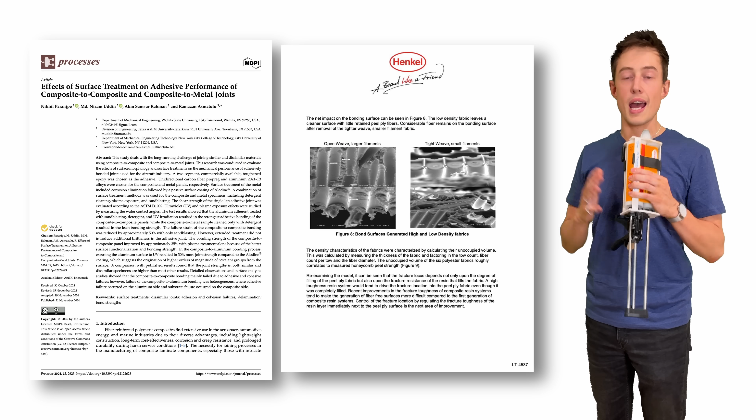It has never been easier, and I mean it. Do you have an idea for what you'd do differently in this bond test series? Look at this, for $60 with some ratchet straps and a little creativity, you can do the same type of test setup that I did and run the experiment yourself. At the same time, there are tons of peer-reviewed resources online that will tell you all the things that I tell you in this video, but more detailed and more trustworthy. The value in that data is enormous, and I don't mean to downplay it, but there is no data like your data. Run the experiment.

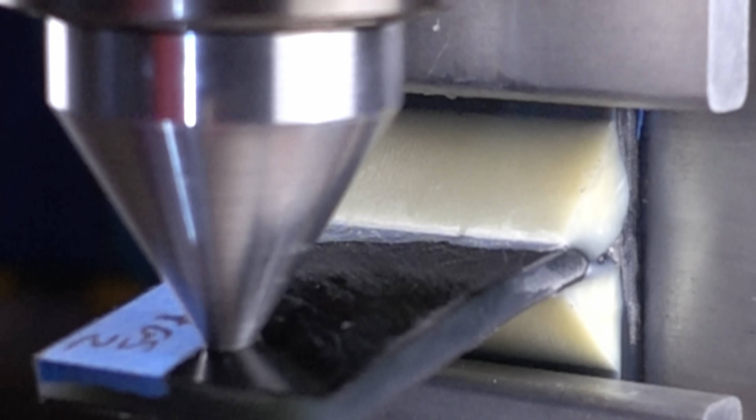All this testing happened over a year ago in the summer of 2024. I sat on this footage for a while because I didn't have the time to put it together until now. I was also a little embarrassed at the amount of testing I went through to find out something I probably could have learned with a few more Google searches. But I gained a lot more understanding through this process, and it was certainly worthwhile.

Sometimes these projects take me a long time to edit and then publish. Like right now I'm working on a payload deployment device, a new nose cone, and a couple of N motors, but those won't be out for at least a month because they're not done yet.